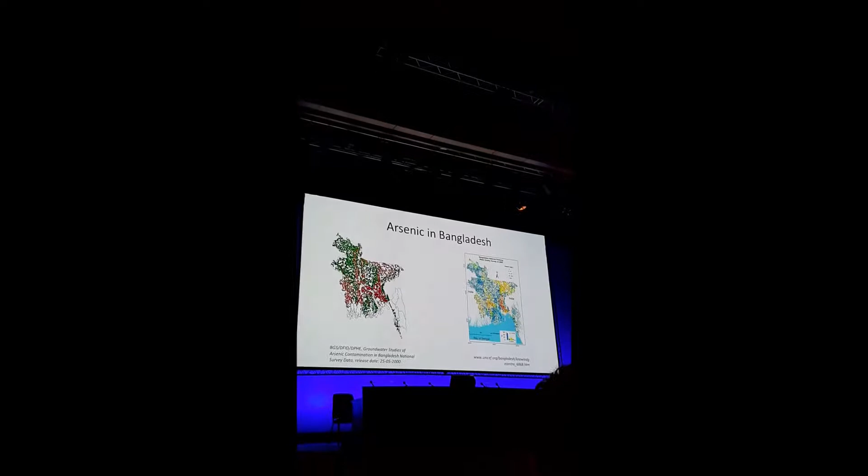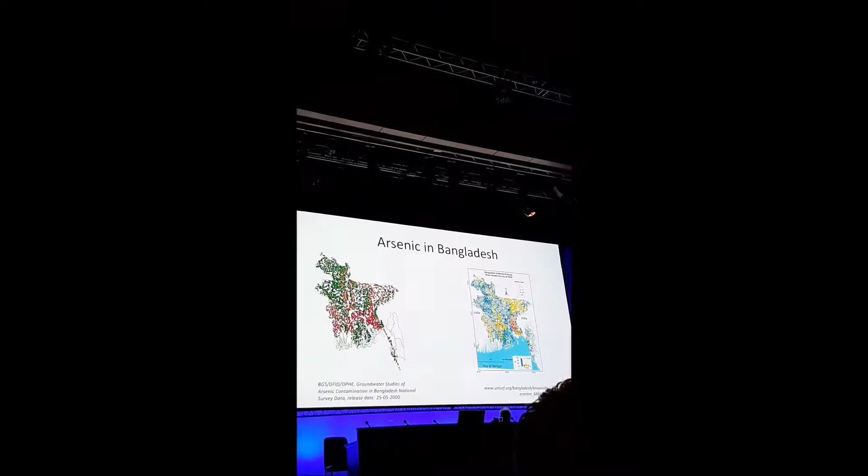So the most famous example, unfortunately, of arsenic poisoning is Bangladesh. On the left you see the first survey that had been done by the British Geological Survey alongside the government in Bangladesh, DPHE. And they investigated over 3,000 wells in the country to assess the scale of the problem. And it clearly shows that the wells that are red are over the national guideline, the orange ones are over the international guideline of the World Health Organization, and the green ones are good, that the scale of the problem is big.

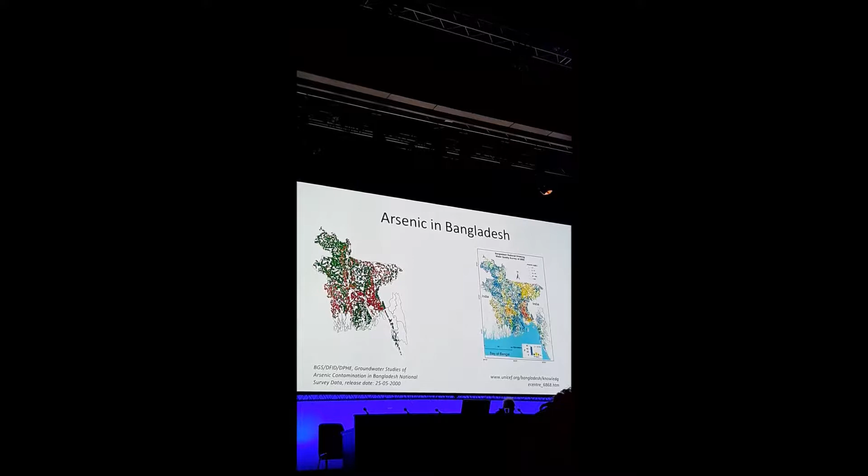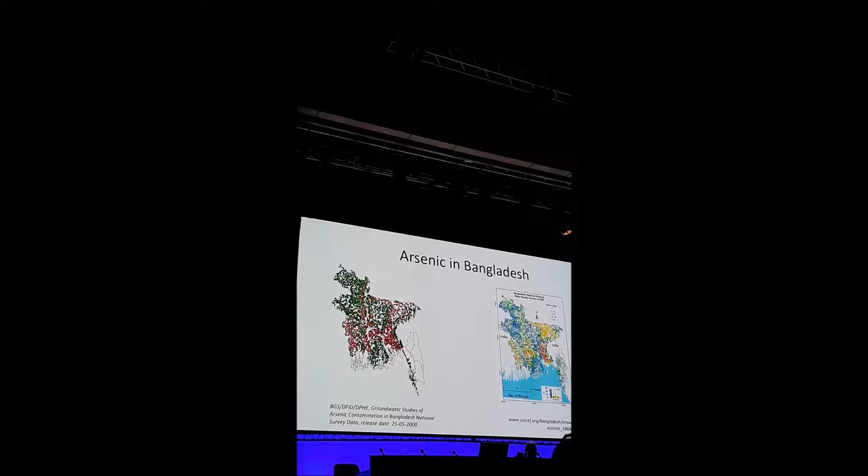On the right, there's another survey, almost a decade later, where they sampled not the direct wells, but the water containers of which people were drinking. So this is the true drinking water survey, and over 20,000 samples were taken. It shows a different map, but it also shows that still between 50 and 60% of the population doesn't have access to safe water, mostly related to arsenic.

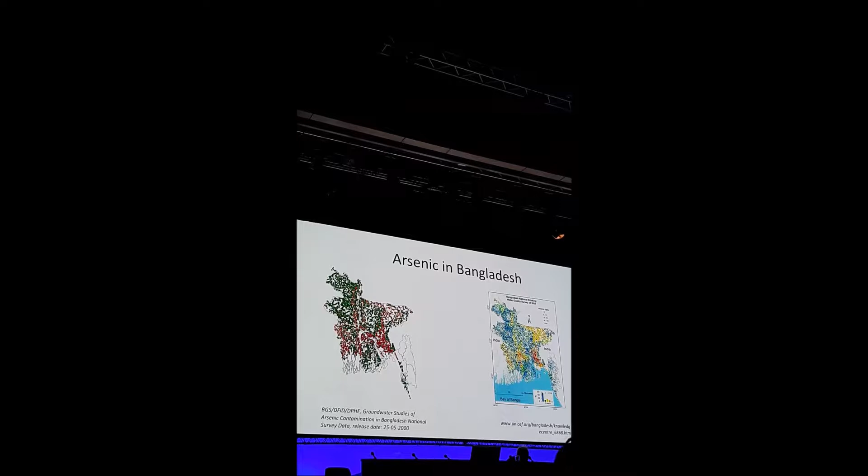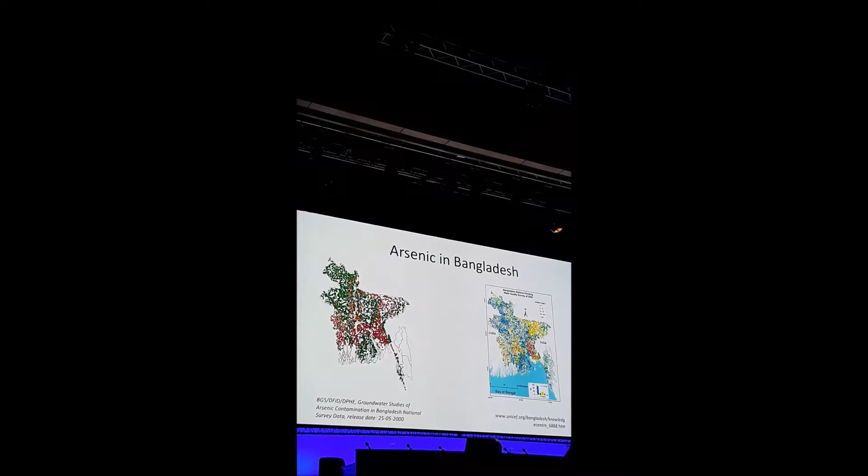Having said that, the intervention of moving away from surface water towards groundwater has been a huge hygienic jump in the country. Before, people were drinking from the ponds or the local rivers, meaning a lot of problems with child deaths. And so there is a new problem now, but I want to point out that this problem, if you look at the DALYs, is smaller.

I made this presentation obviously before today, but the knowledge gap has been raised, and apparently I knew about this, because I think there is a huge technology gap. So if we go to a village, for example in northwest Bangladesh, where we are working now, close to Rajshahi, people have access to water. So there's a hand pump in most of the premises. However, it's often not known whether the water quality is good for drinking or not. So when you decide to drink this water, you are at a high risk of exposure, whether you have arsenic or not. The risk is there.

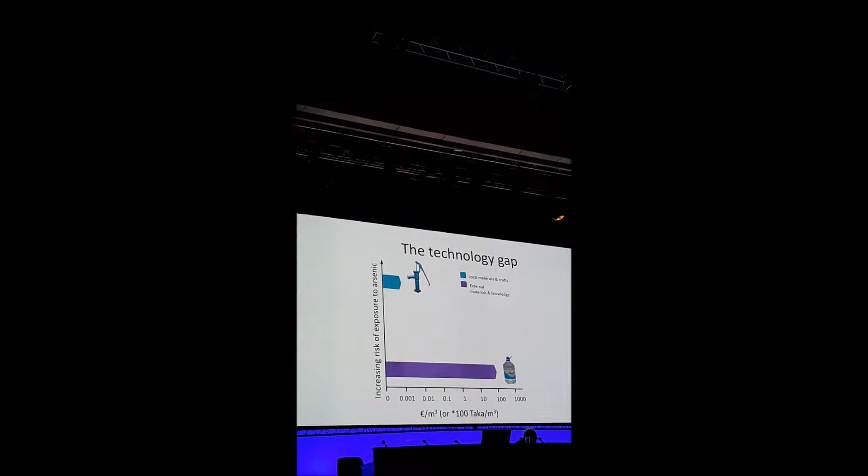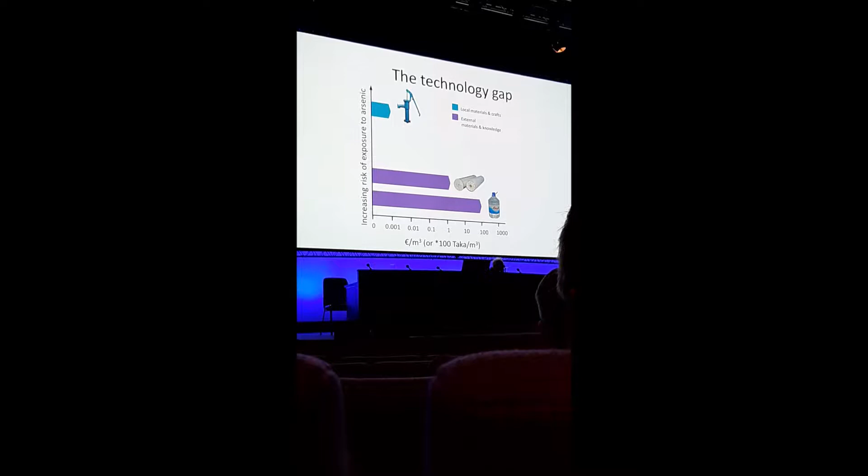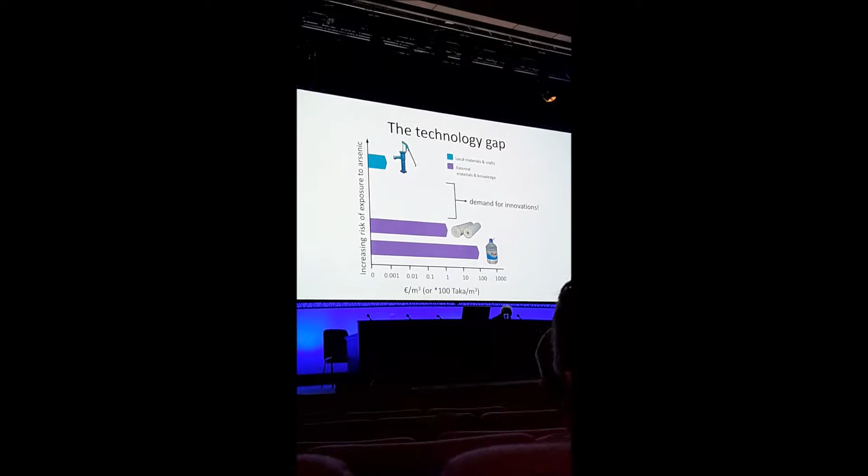Meaning that there's a huge demand for innovations, for local innovations, innovations that suit the context in which they have to sustain. So why crossing borders? I'm obviously not from Bangladesh myself, although I did my PhD research there, so I've been there since 2007.

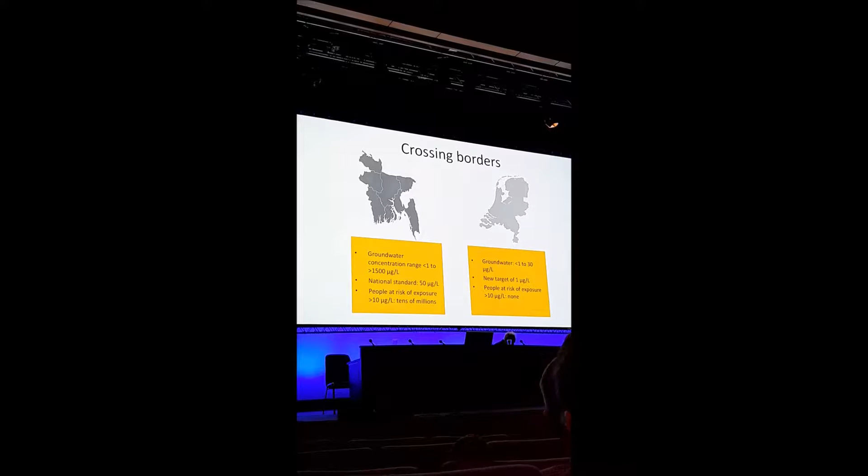But I was doubting whether I should put up this slide, because the differences couldn't be bigger. In Bangladesh, as I said, the concentrations of arsenic are really high, over the milligrams per liter. Whereas in the Netherlands, we have a few locations almost reaching 30 micrograms per liter, which is below the guideline in Bangladesh. The national standard in Bangladesh is 50 micrograms per liter for drinking water, whereas in the Netherlands we have just adopted a new target, which is to go under 1 microgram per liter.

And then the people at risk of exposure over 10 micrograms per liter, which is the WHO guideline, is tens of millions in Bangladesh. Estimations vary here and there, and in the Netherlands, let's be honest, it's none. Nevertheless, the research aim is quite similar, because in the Netherlands we rely a lot on aeration filtration systems. Not to give a long introduction on arsenic removal technologies, but just to be very short, there are two groups.

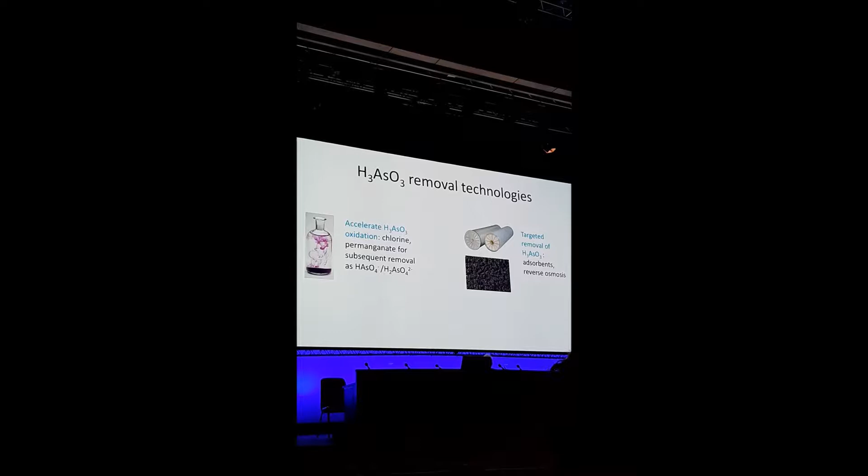Groups that rely on pre-oxidation of the arsenic with a strong oxidant, for example chlorine or permanganate, for subsequent removal of the arsenic 5, the arsenate, which is charged, so you can remove it with coagulation or ion exchange resin. Other group of technologies are specifically targeting arsenite, so the reduced form of arsenic in the water. So for example, there are adsorbents around, and there are also membrane barriers that can be used for it.

In my presentation, I want to show that we don't need these technologies. Of course we can use them, but the past has shown that it's difficult to adopt them in Bangladesh, and I think we can do without for most water types. Because the groundwater carries the main ingredient required to remove arsenic from the water. It carries ferrous iron. If ferrous iron comes in contact with air, it will oxidize to form iron 3+ and iron oxides. These iron oxides are perfect sorbent bases for arsenic.

However, as I mentioned before, we have the reduced species in the water, which is uncharged, more difficult to remove with iron, and we want to have the oxidized form of arsenate in the water. This is where the problems start. Because if we aerate the groundwater, the redox potential, the EH, will go up. So will the pH, because we sparge out the CO2. And hydrous ferric oxides, so these iron oxides, HFO, will form.

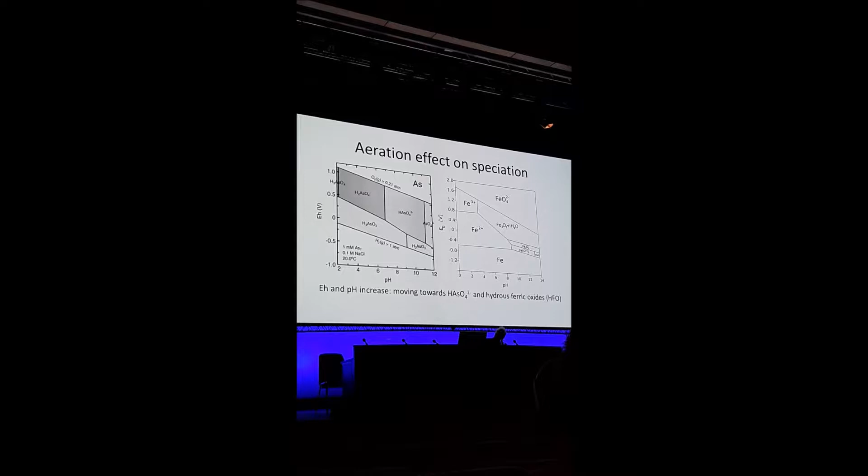And you would say that we also oxidize arsenic. If you look at this graph, I'm sorry, I didn't make it myself, the EH-pH diagram, you would say, yes, we will form arsenate as well. So perfectly, we can remove them together. However, arsenic oxidation, it's really slow. If you just add air, you can wait for a week before it's all oxidized. Whereas you all know iron oxidation at neutral pH, it's really, really fast, seconds or minutes.

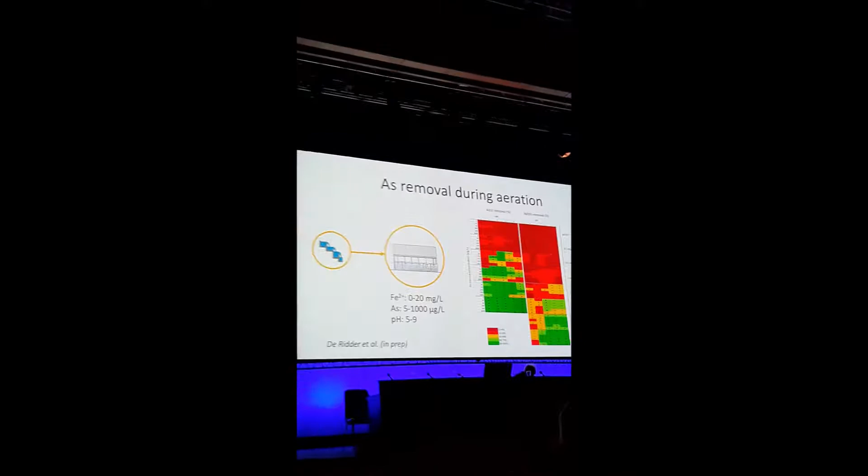So if we simulate this aeration of the groundwater in a simple jar beaker experiment, where we combine different concentrations of iron as well as different concentrations of arsenic over the relevant pH range for us, you can make a really nice overview. In this overview, you see on the left, it's arsenic 5, which is the oxidized form arsenate. And on the right, you see the arsenic removal as arsenic 3.

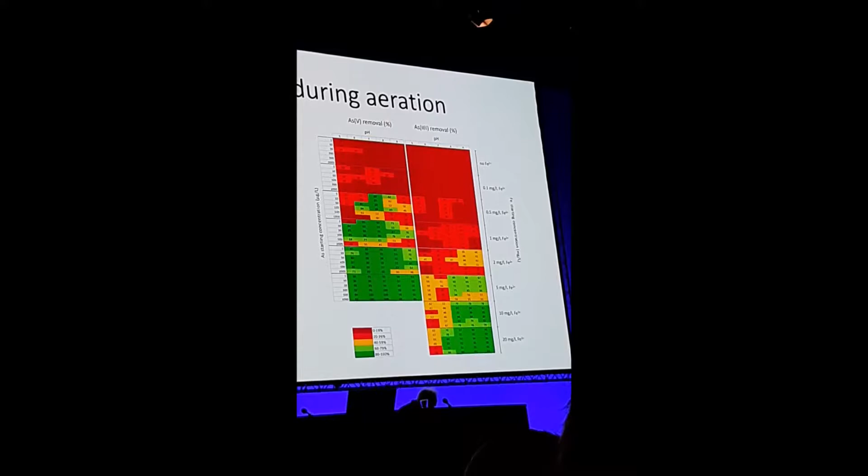And if we zoom in further, in the iron range that is of our interest, between 0.5 milligrams per liter of iron all the way up to 5 milligrams per liter iron, well, the left is greenish, meaning that it's removing arsenic over 80%, whereas on the right, where it's the reduced form, it's all reddish. So it's clear, if you just aerate the water and you do nothing else, you will only remove a fraction if you have the reduced form of arsenic, and you remove a whole lot if you have the oxidized form of arsenic. But you don't have that if you just aerate the water.

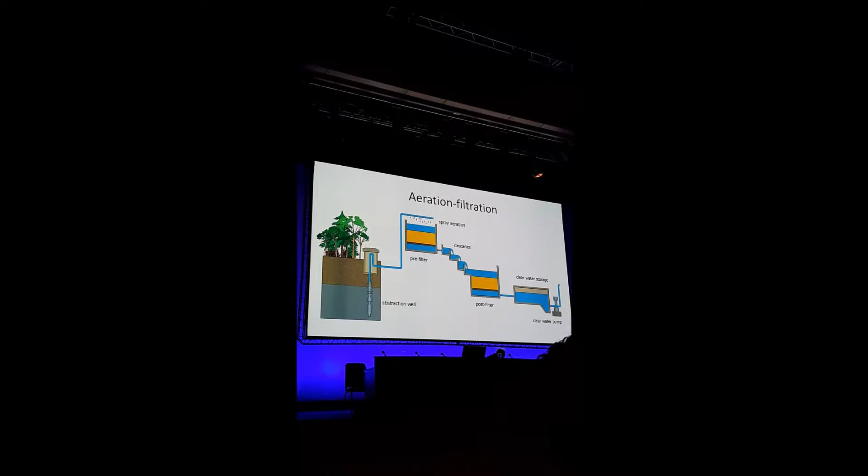And what we were interested in is to see what happened to arsenic also in the filter bed. Because if you just aerate, you still have arsenic 3 left that enters your bed. And what we saw is that arsenic is hardly removed in the filter bed. There is some removal, but not too much, a little bit depending on the design of the filter.

What was particularly interesting to us is that we saw quite fast oxidation of the arsenic 3, so the arsenite, the reduced species, again to arsenic 5 in the top layer of the filter bed. For free, for nothing. But it was not removed. Arsenic came out as arsenic 5.

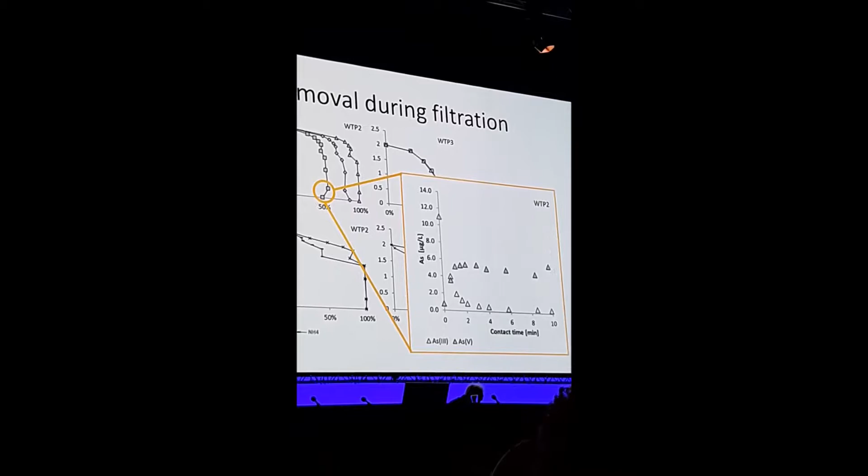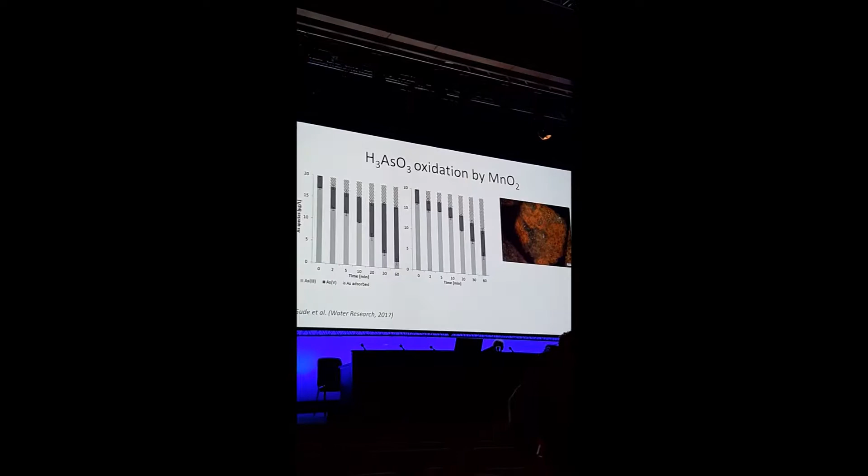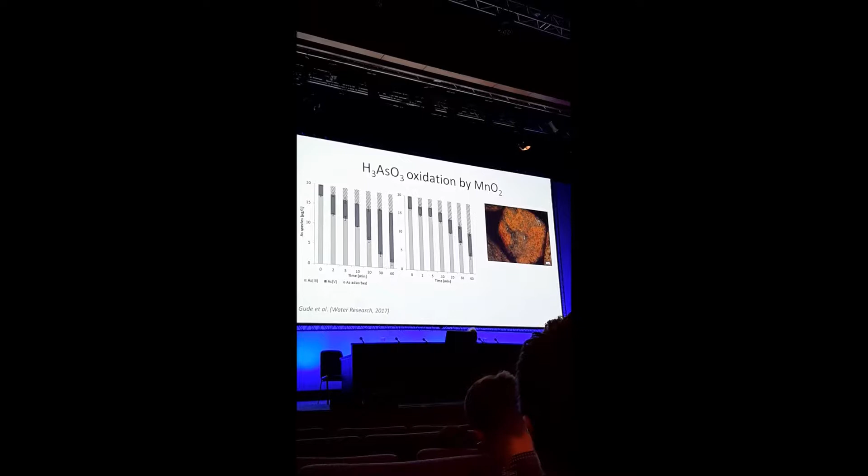So the first question we had, why is this arsenic being oxidized in the filter bed? And the first suspect we thought of was manganese oxides. Manganese oxides are known to be capable of oxidizing arsenic, and when we did a small lab study with manganese oxide we bought, that's the graph on the left, and the manganese oxides we took from a filter bed, we indeed saw really beautiful arsenic oxidation profiles. Not as fast as we would expect, but still it happened.

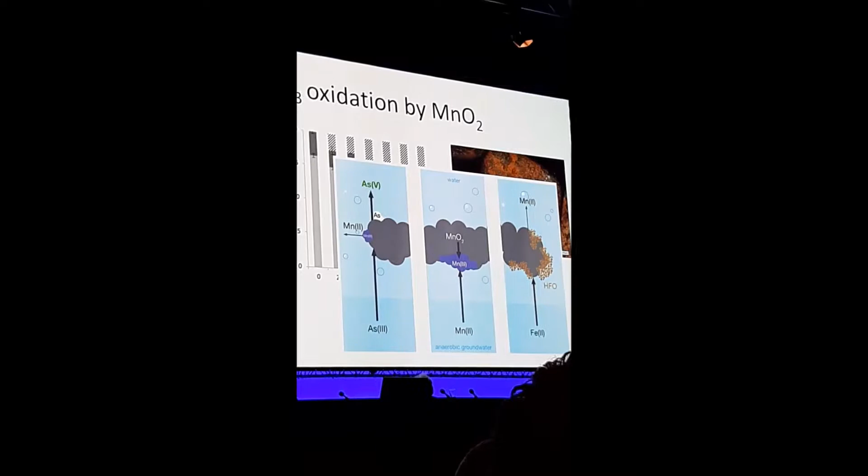However, as I said, in groundwater, arsenic doesn't come alone. There's iron 2, there's manganese 2. If you add those two to the same beaker, you do not get arsenic oxidation. It's completely hindered by the presence of iron 2 and manganese 2, which will be oxidized, by the way. So in our opinion, we're quite certain it's not the manganese oxides that do the job.

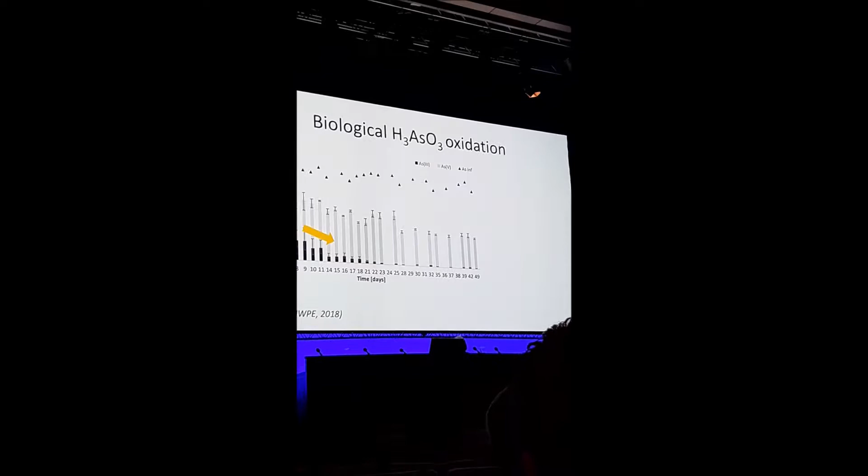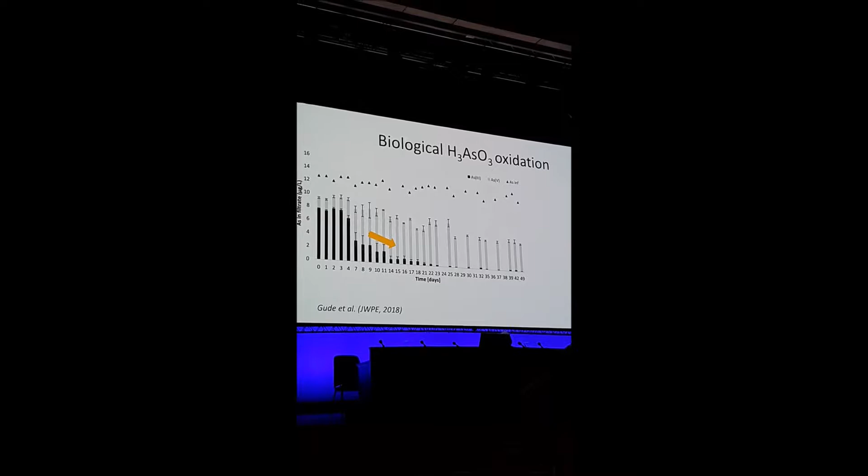So being civil engineers, we were not really looking forward to going in this direction, but we saw no choice but suspecting microbiology. I know there are a lot of bioengineering experts in the room. We felt uncomfortable moving in this direction, to be honest. But we saw now in many, many different systems that there are organisms that are doing the job for us, in groundwater, in surface water even, and they're not superbugs. That's what we thought first. No, they're just very ordinary groundwater native organisms that grow in any filter.

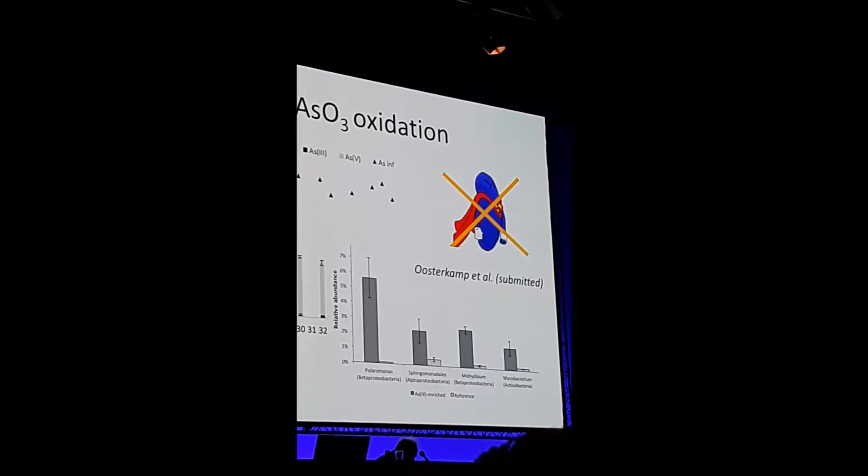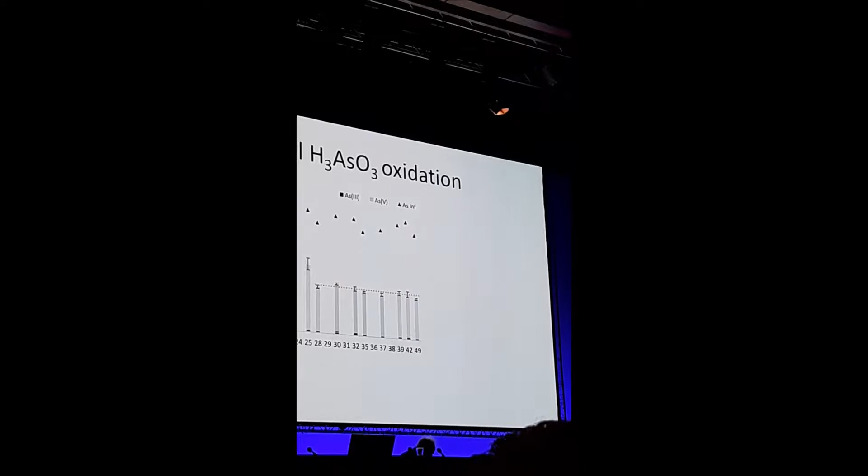I think also if you have filters at home, you might check it out. They might be there as well. So it's something that actually does happen for free already in the filters, but we're not utilizing it for removal. Because as you can see, even after 49 days of operation, the removal of arsenic has stabilized, so there's no more removal being achieved, even though it's fully oxidized in the filter.

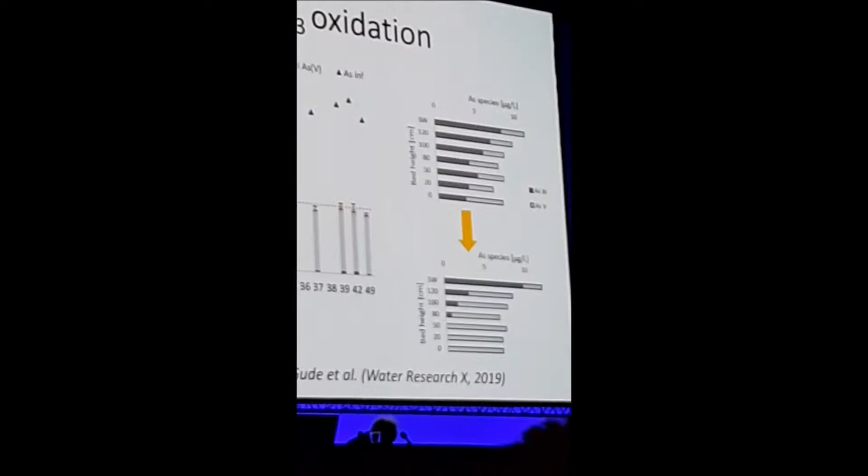And what we found particularly interesting here is that after 28 days, this stabilization, and we showed it later in different experiments where we could measure over the height of the filter, shows that arsenic bacteria are moving up. So initially, when you just start up a filter, it is over the whole height of the filter, that's the top one, and then after several weeks, the arsenic oxidation will happen fully in the top layer of your filter bed. And it moves faster than ammonium oxidation and manganese oxidation, by the way.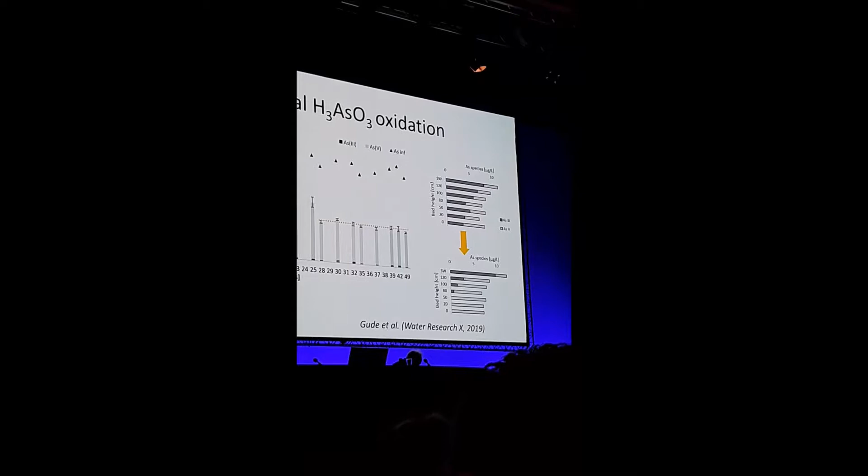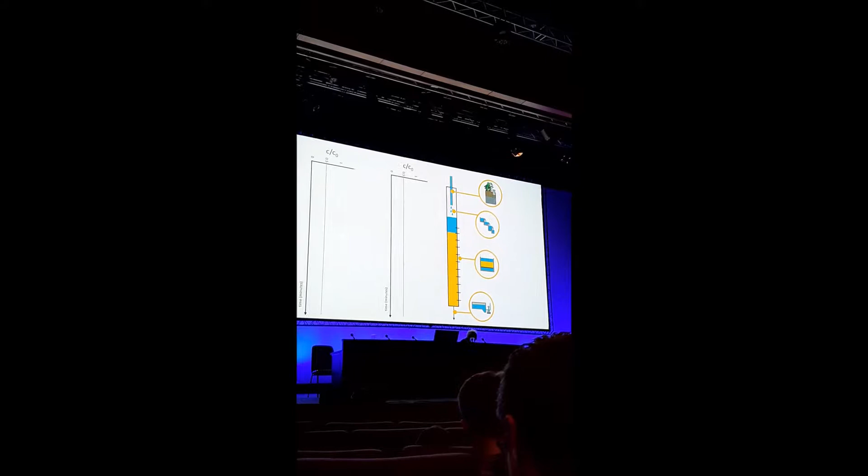So what do we know now? If we would simulate aeration filtration in a column setup, and we would plot iron, we would have first iron 2+ in the top of the system. Upon aeration, there will be fast oxidation of iron 2 to iron 3 and immediate formation of HFO, these iron oxides. And then they're removed in the top layer of the filter bed, depending on the filter media. If it's a sand filter, for example, in general, the top layer is where the iron is removed.

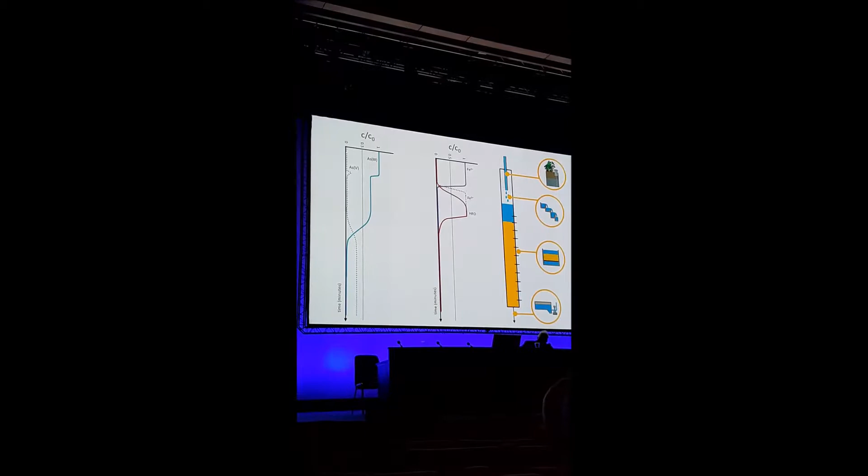So if we look at arsenic now, the profile looks different. You get some co-oxidation when iron oxidizes, we know that. So there's partial oxidation and removal of the arsenic. But then nothing happens until the water reaches the filter bed, where you also get oxidation, the microbial oxidation, and partial removal.

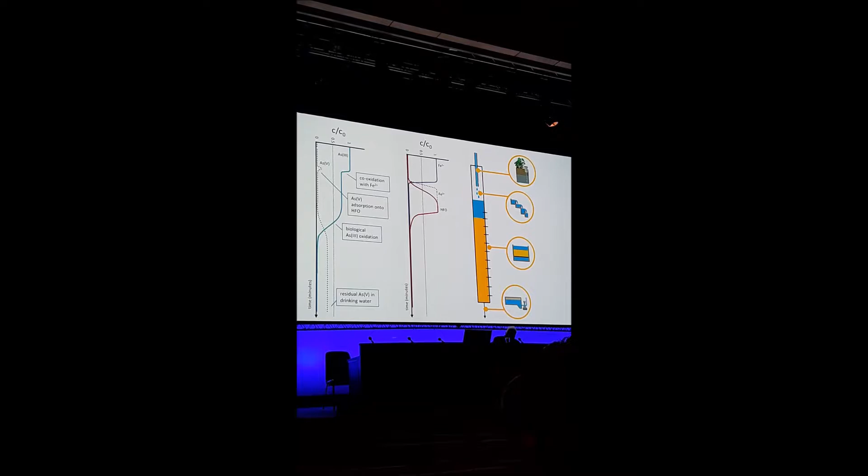But there's still residual arsenic 5 in the drinking water, so we can do this better. Now knowing the ingredients of our system, can we engineer it such that we enhance the removal that you can achieve with the iron available in the water?

There are several moments where you can intervene. You could enhance the co-oxidation and removal with iron, you could stimulate the biological arsenic oxidation, and you could increase the adsorption of arsenic 5 onto the HFO deeper into the filter bed.

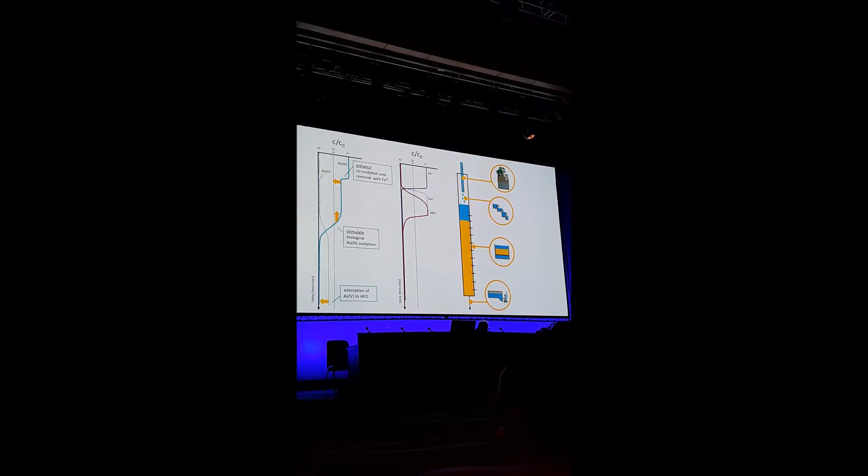As the starting point of our study, we didn't look at the arsenic, but we focused on the iron, because that is the sorbent. We wanted to delay the iron oxidation for it to be available once arsenic was oxidized, and we wanted to promote HFO mobility over the filter bed to make sure you don't just have sorption potential at the top of your filter bed, but also deeper into it.

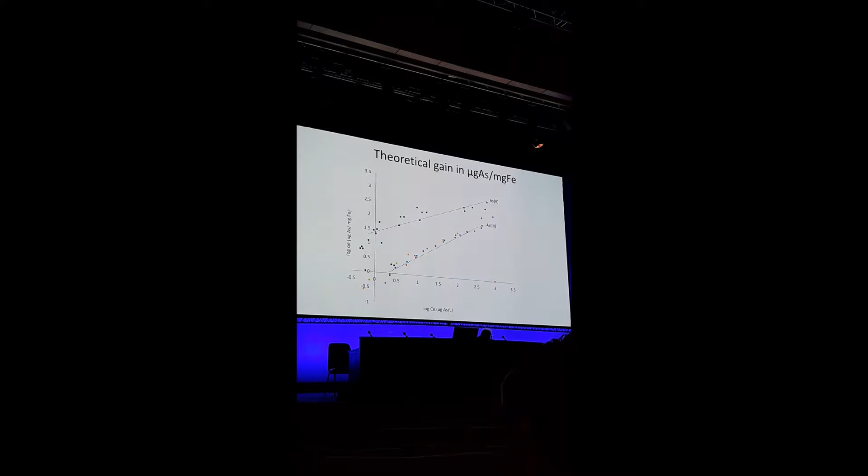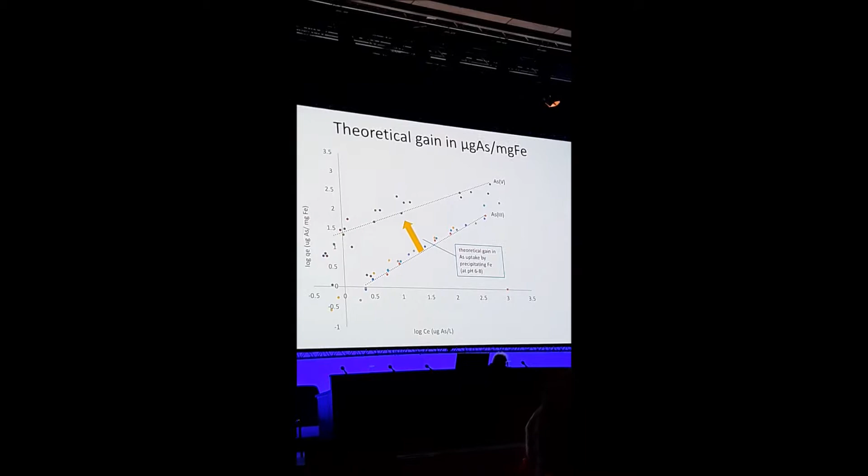I thought it would be nice to show you the theoretical gain that can be achieved. If you look at the micrograms of arsenic that can be sorbed per milligram of iron, whether it's arsenic 3 or arsenic 5, this is not being utilized if you just have aeration filtration.

So our task for engineering is to stimulate arsenic adsorption onto this iron while promoting the oxidation, preferably biological. So we developed a few solutions for this.

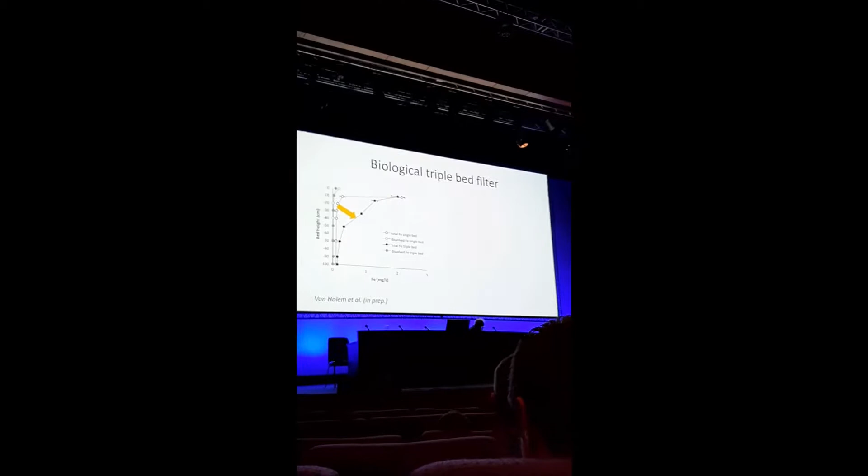One is the biological triple bed filter, as we called it. It's a relatively simple filter actually, like a dual bed filter, but then triple. So we have very coarse media, anthracite on top, coarse sand in the middle, and then garnet sand at the bottom, so we can backwash it easily.

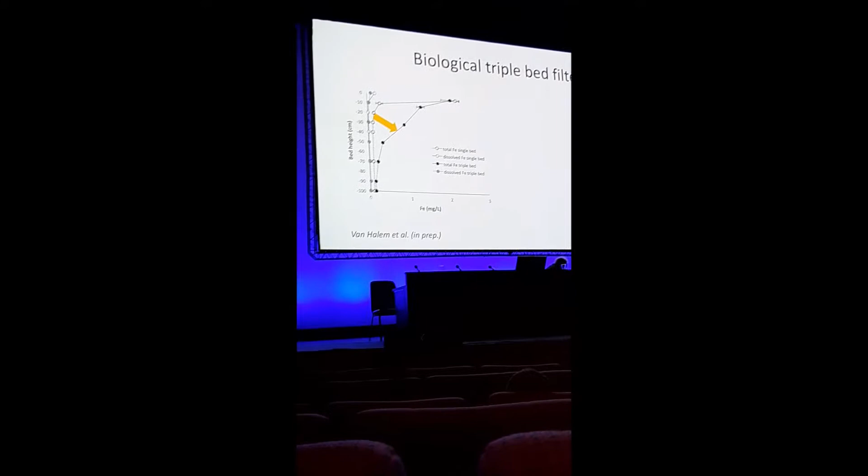As you can see, the iron profile moves further deep into the bed. The dark dots are the triple bed, whereas the open dots are the single bed.

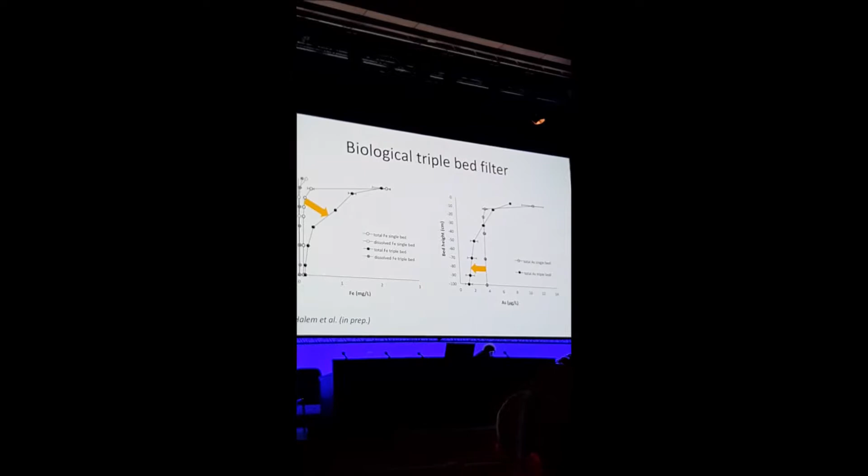Then there's the question, will arsenic follow? And yes, arsenic removal follows over the full height of the filter bed, meaning that we achieved the new target of 1, more or less. We were quite happy with it.

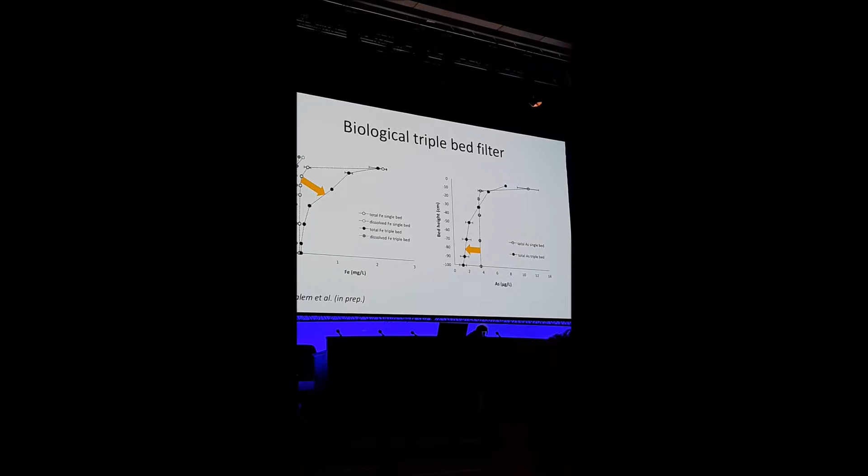Things you can play with, for example, reducing the pH slightly will enhance arsenic sorption on the HFO. What I find particularly interesting is we also tested the supernatant water level, on the right. At the top we had a really low supernatant water level, that's the water on top of your filter if you have a saturated filter.

At the bottom we increased the supernatant water level to 1 meter 30. What you do then is stimulate homogeneous iron oxidation over heterogeneous iron oxidation, meaning you form flocs that are more mobile in your filter bed, which you can see on the left where the iron is plotted, ending with a lower arsenic concentration in the end. Again, concentration differences are small because this was a pilot site at Pitspa in Belgium, and unfortunately they don't have high arsenic.

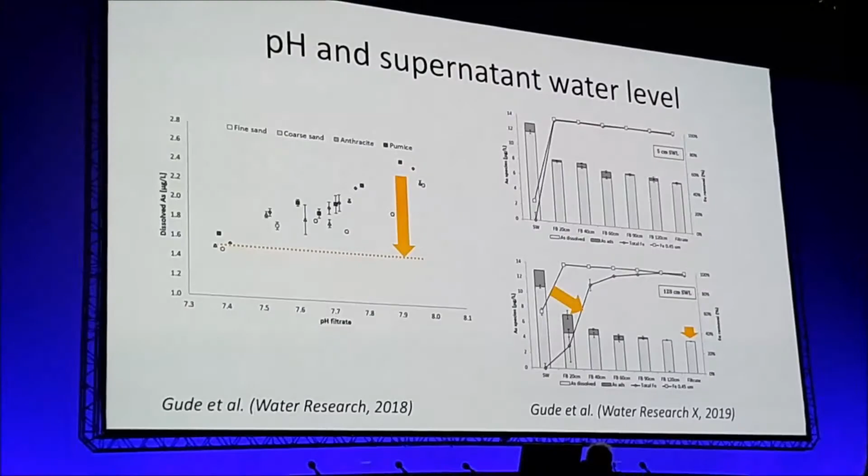But we also go to Bangladesh. This is Kajul, a PhD student, and the research we're doing in Bangladesh is in the region where he's originally from. He's investigating how to use these insights for a system in Bangladesh.

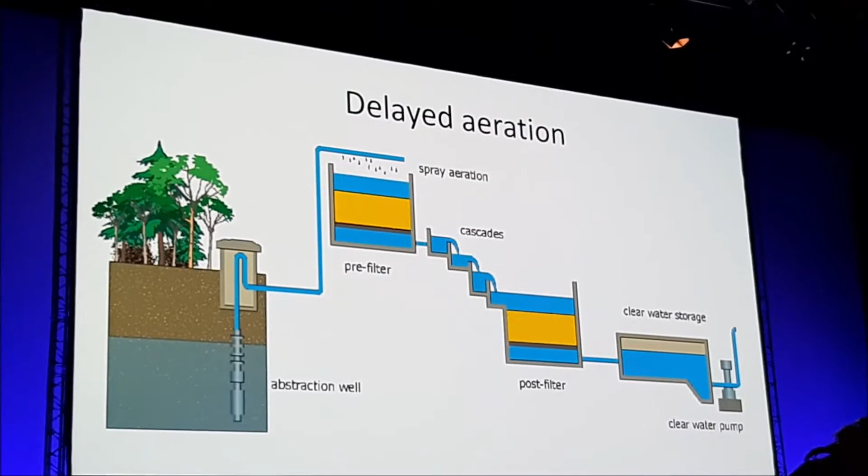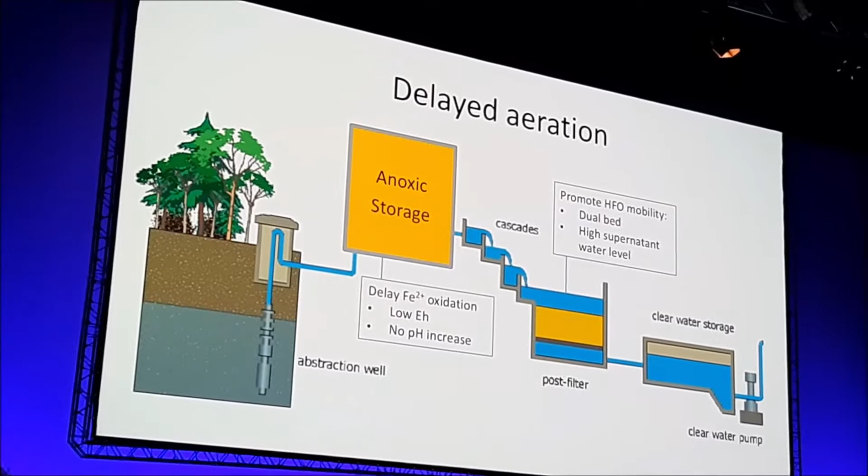What we did is we wanted to delay this iron oxidation, and we decided to do it with anoxic storage prior to aeration filtration, because at low EH and without aeration you would not have a pH increase. This would reduce the iron oxidation, together with the promotion of HFO mobility in a dual bed and a higher supernatant water level.

Well, the setup in Bangladesh looks really nice. Normally you have these rusty PVC columns, but we collaborate with industrial design engineers, and they found a rickshaw artist available to make this for all of our filters. Really nice, the color makes it special.

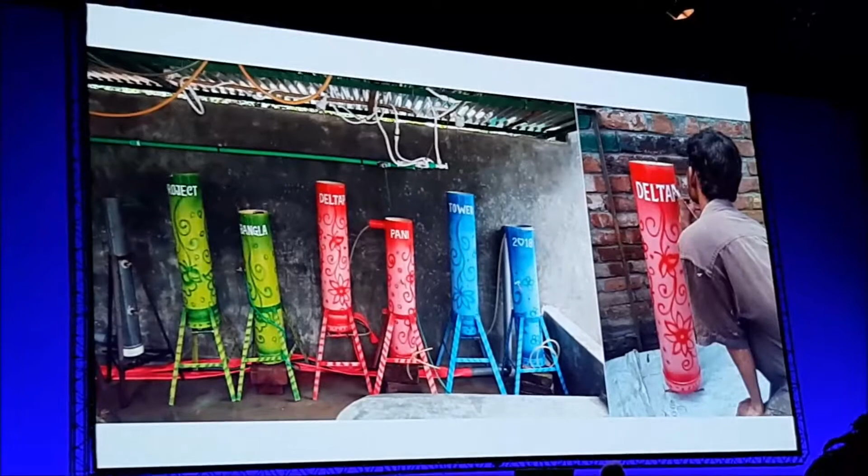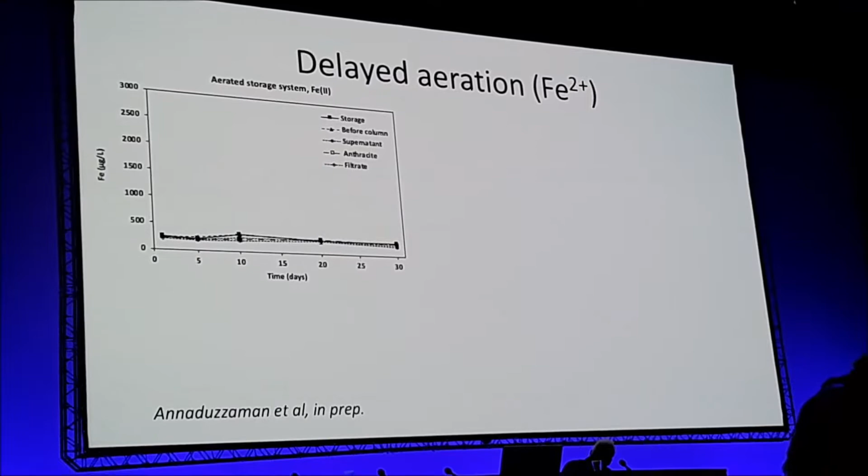The PhD candidate is still digesting the results, but I thought I would share them anyway, because I think they're spectacular. If you have an aerated system, just plain aeration filtration, you remove your iron rapidly during oxidation, as I said before. So all the iron plots overlap for either sampling in the storage container or before and after the filter.

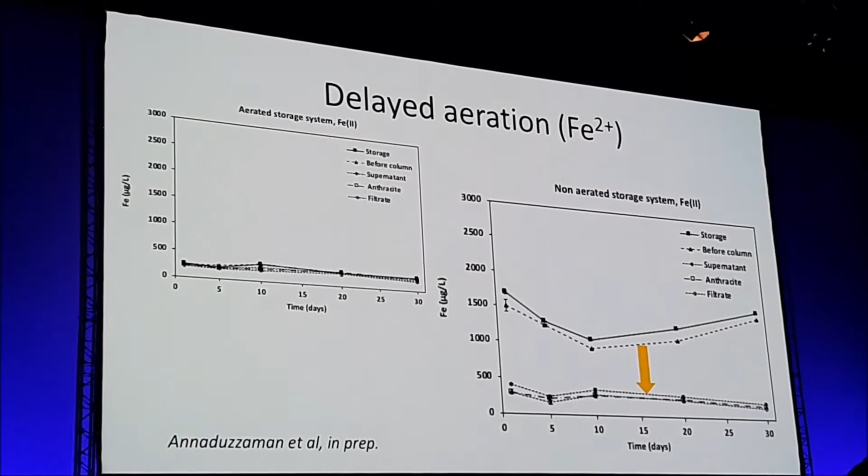However, if we have no aeration, we call it anoxic storage, but I suspect there's some oxygen contamination in our system, because we do get iron oxidation already on day 1, but only partially, which is really what we wanted. The iron is not removed in the storage container, but is removed after aeration.

In an aeration filtration system, we go from about 300 micrograms per liter to 140 micrograms per liter. So initially there seems to be better removal, but I suspect adsorption on the sand we were using, which is just natural sand from there. So the removal is just over half of the arsenic.

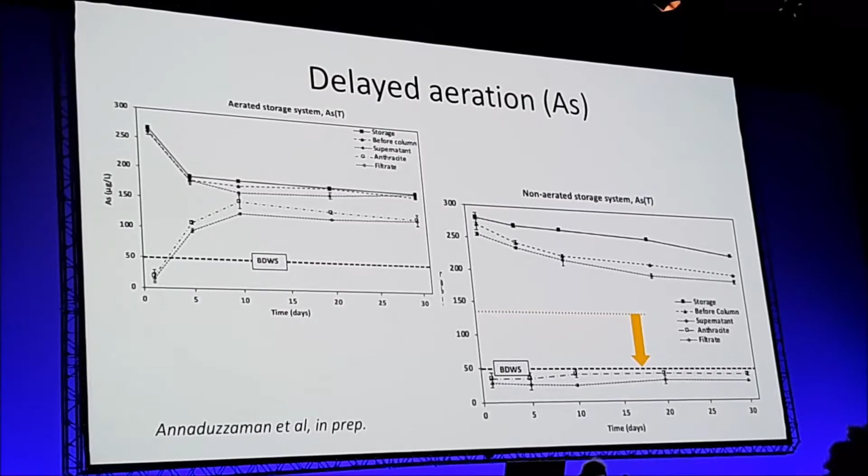Whereas if we have a system where no aeration has occurred, we reach 40 micrograms per liter, which is a huge increase. And I think we can even do better, but this is a really nice start.

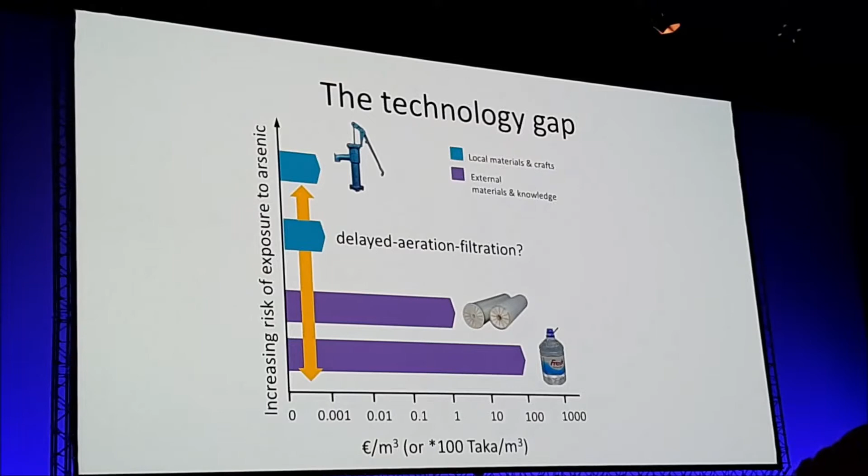Yeah, but does this fill the technology gap, eh? I think every story needs to have a head and a tail. I don't know, I think this is a big jump still ahead. But what I do like is to experiment and see what we can do with these process-related insights towards design of a system that could be applied.

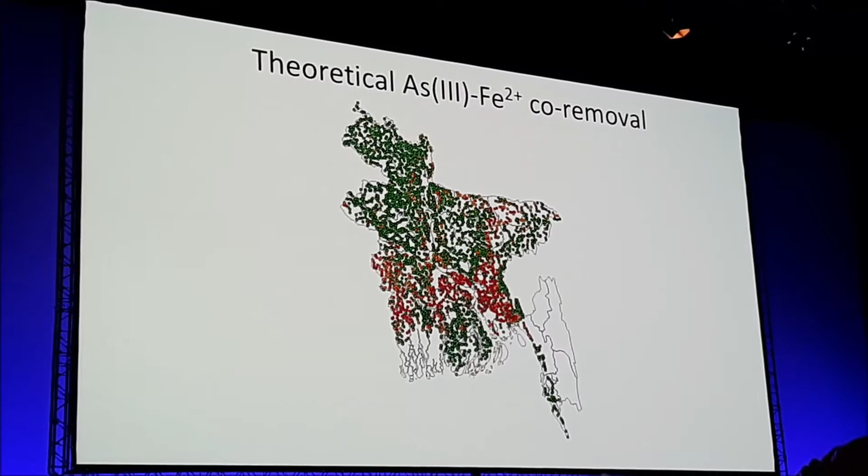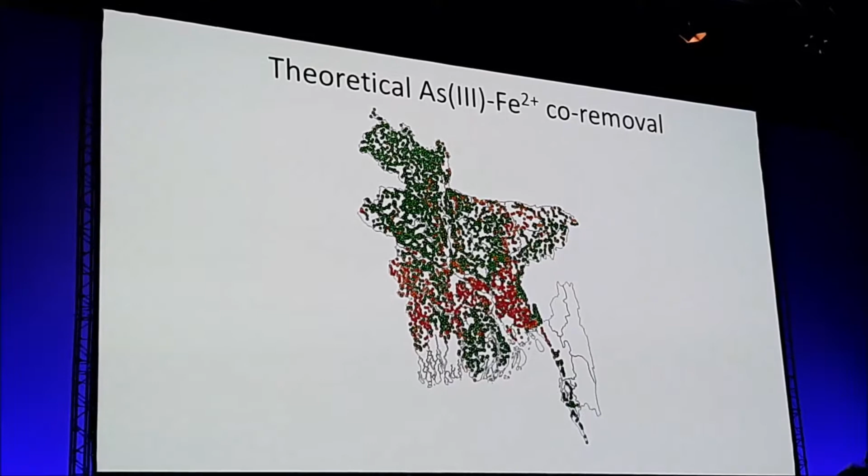And if we may dream, the theoretical removal of arsenic-3 with iron, if you look at the arsenic-iron concentrations that have been measured in the BGS study, the map would look like this. Slightly different than the earlier map, but it's difficult to find the differences.

And if we would work with a system where we optimize iron removal, co-removal with arsenic, it looks like this, meaning that instead of 65, 95% of the wells in Bangladesh can remove arsenic just by relying on the iron in the water. So there's a dream.

What's next? Well, what's important is to know, of course, where's the arsenic, but also where's the iron in the system, in order to start constructing filters, whether it's central or decentral, doesn't matter.

So what we tested was an iron test strip app. It's an existing app where an iron test strip is combined with the app. Maybe some of you might have used it as well. It's inexpensive, easy to use, so we had it used by end users themselves. And we wanted to generate crowd data with that.

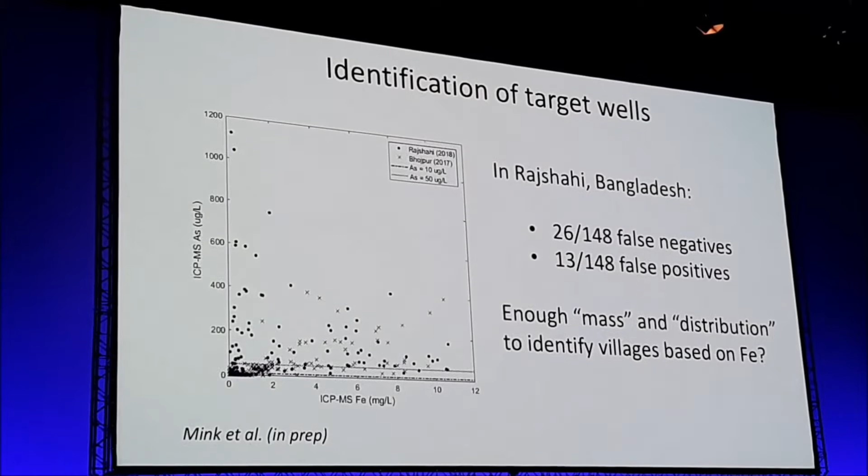But does this crowd data beat the inaccuracy of a test kit like this used by untrained people? Well, we did this study in India and in Bangladesh. I'll focus on the Bangladesh data here.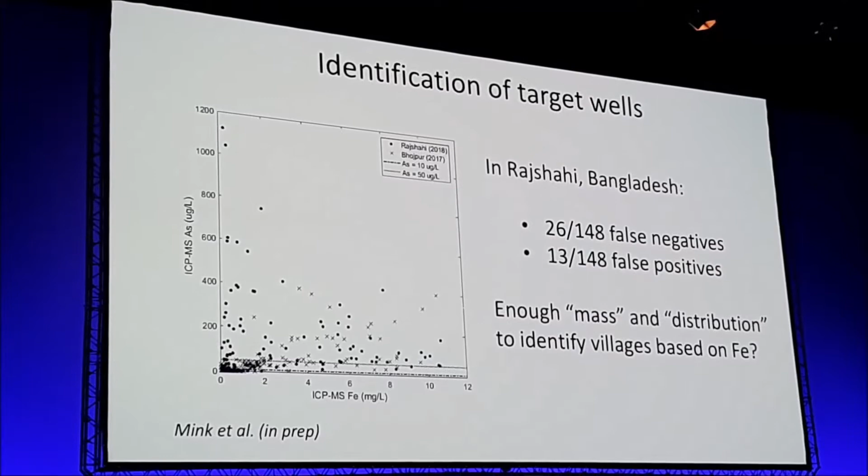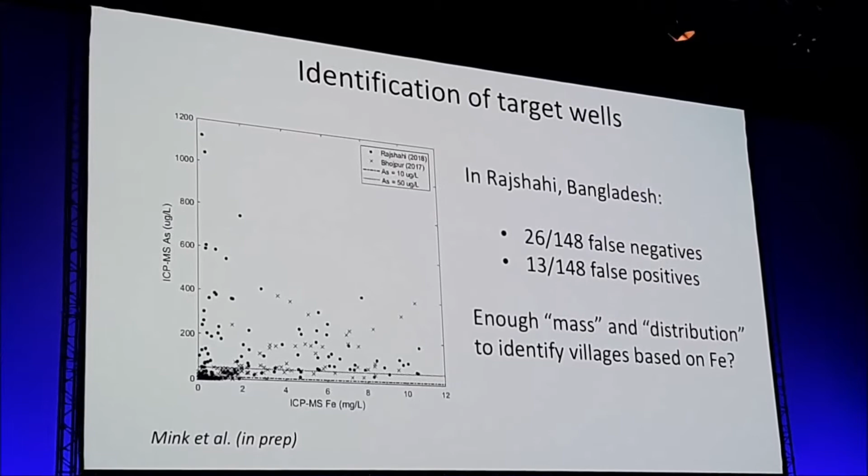In this map, it's just the ICP-MS data for arsenic and iron. And if you take a glance, you see immediately there's not a really strong relationship between the two. You can also see in the false negatives that there are 26 out of 148 in our study area in Bangladesh. So at first glance, maybe this doesn't work.

However, if you generate enough mass and the distribution of your false negatives is evenly through an area, through the villages geographically, for a screening tool it doesn't matter so much.

So if you plot our data with QGIS, on the left you can see the iron test kit results. There are more or less 7 villages included in the study, and to the left, right, and all the way up, these villages are difficult to see because they're really small dots, hardly any iron. Then in the middle and in the bottom, there are also a few villages with really high iron concentrations.

So just relying on iron, knowing that iron co-occurs with arsenic, you know where to go, right? And indeed, if we plot our arsenic data on top of these test kit data, you get a really nice map. So I would say, even though this relationship between the two is not perfect, as a screening tool for local governments, it can work really well, as well as empowerment of people, so they can test their own well, showing to the government that we have an issue potentially in our village.

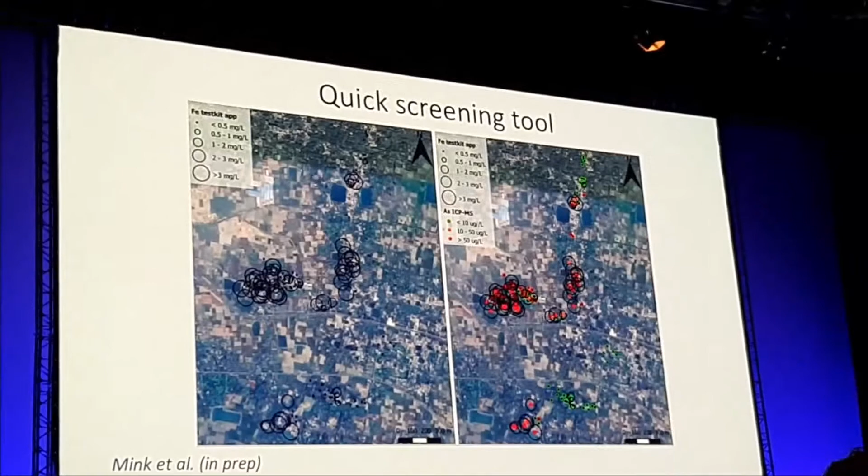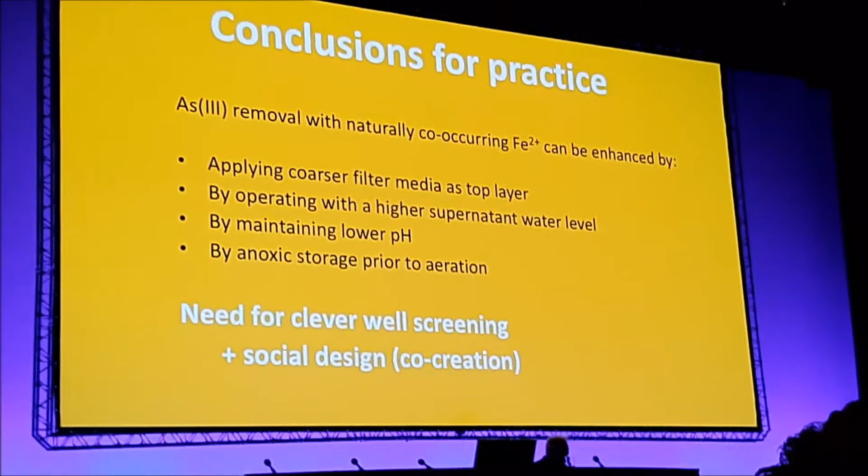So, conclusions for practice. Yes, it is possible to enhance the removal of arsenic with naturally co-occurring iron, with simple engineering tools: apply a coarser filter media, operate a higher supernatant water level, maintain a lower pH, and use anoxic storage prior to aeration.

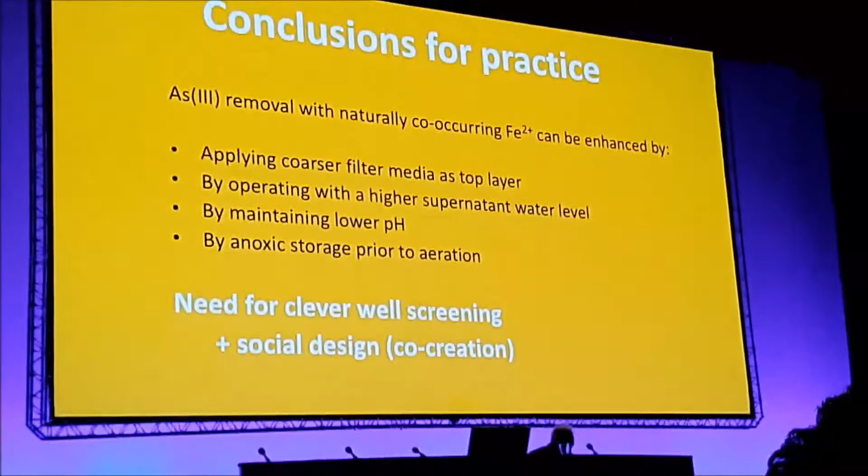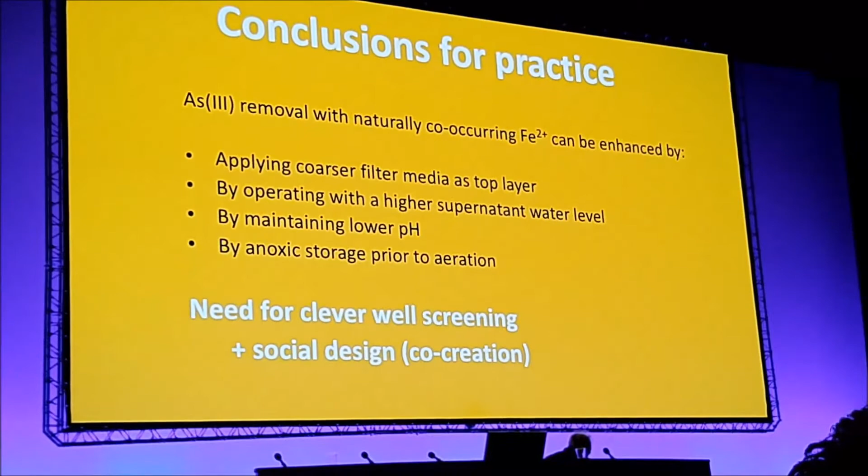But in Bangladesh, there's the need of clever well screening, as well as social design. Maybe co-creation, you've heard of it, it's key in working in villages like this, in the international context, but also difficult because amongst engineers, it's logical you co-create, but if we talk about end users in a village, how do you co-create with them? They are your customers, in a sense, or the customers of your local partners, at least.

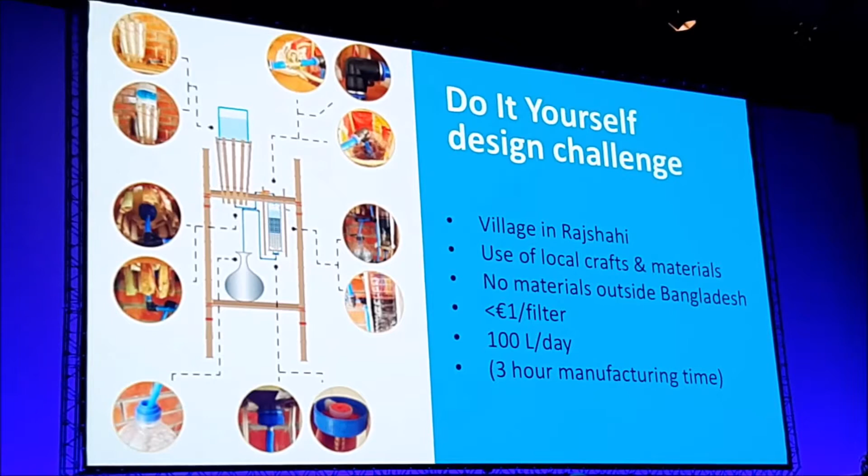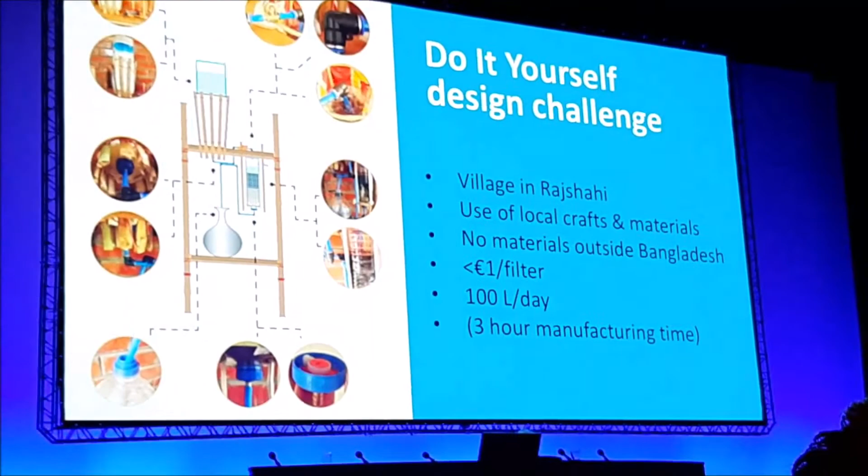So what I thought would be really nice to do in our study is to design a design challenge. I asked my colleagues of industrial design engineering, based on the processes we identified, anoxic storage, aeration, dual membrane filtration, dual media filtration, to design a filter that should be constructed just with local crafts and materials from the village.

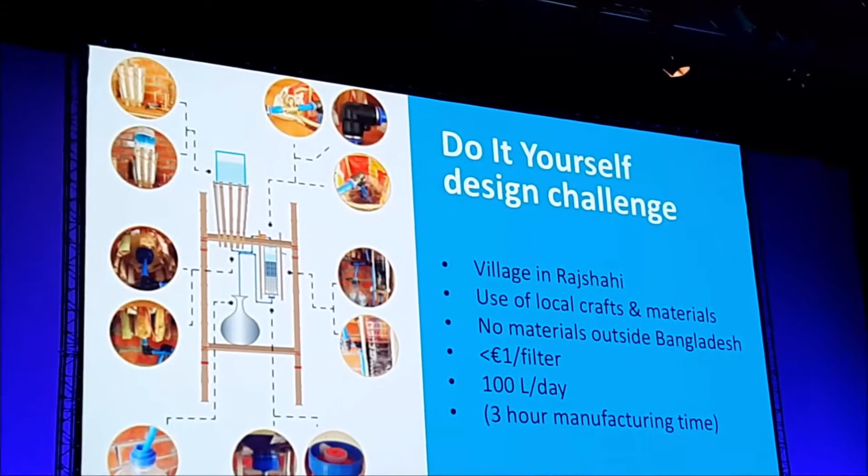No external machinery, no external materials. In the end they were allowed a few fake Festo tubes, connectors from Dhaka, which cost 50 cents. I want to get rid of those in future designs. The filter should be really cheap, produce enough for a family or more. And they added their own criterion, that they should be able to construct it in 3 hours.

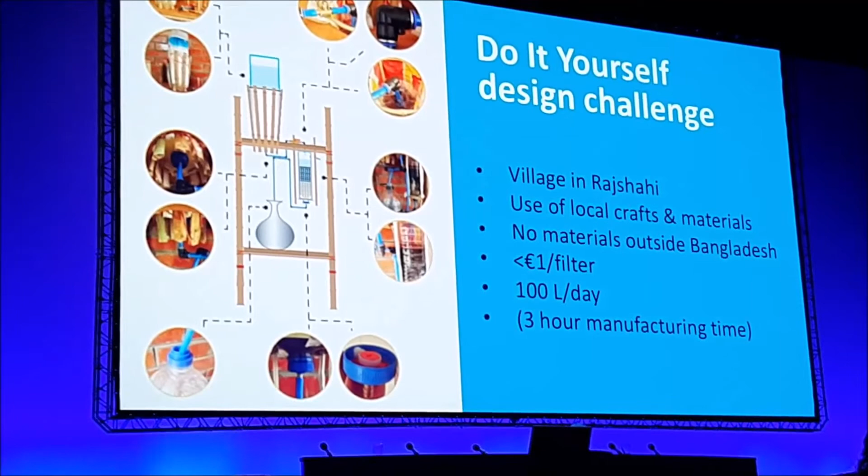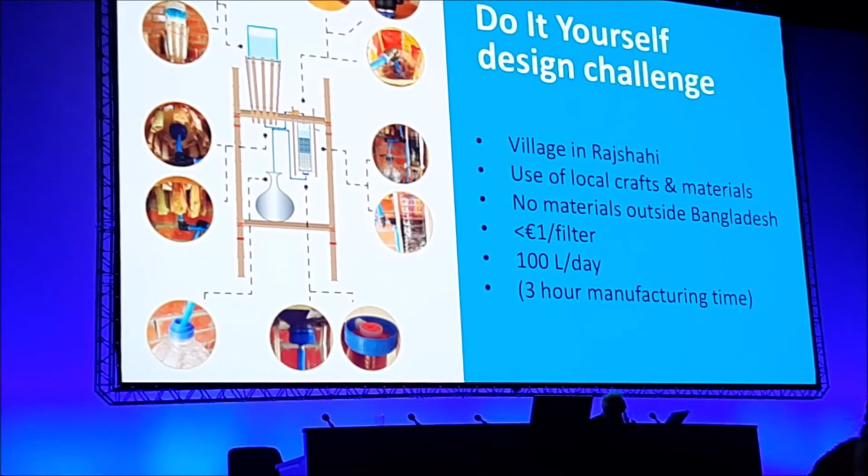My own civil engineering students always just spit out data, the slides I just showed you. But these industrial design engineers keep a blog, and I want to show you a short fragment of it. I think it shows the kind of environment we work in. It's a loud environment, but to me it gives this grassroots feeling. I know this solution might not be the solution, but it's something that activates people, which I think is valuable.

So there we go. Ooh, and I'm feeling...

Hey everyone! Join us in an auto rickshaw, fully loaded actually. Hey, we are 3 hours in line and we are going towards Uttar Kazipara. We're each giving ourselves 3 different tasks to work on individually.

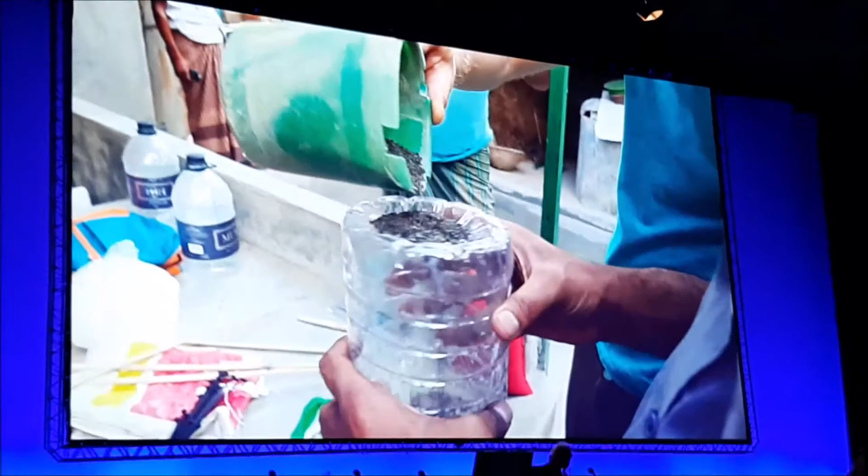Don't worry, why don't you say what you just told me on camera? Okay, we have just done so many works in less than 3 hours. We set up all the filtration system along with the frames and the pipings, poured the sand and the carriers, cut the pipes, everything in less than 3 hours, and I think it's a great success for us. Good luck to you.

Very good, well said. So everything is installed. Tomorrow we are gonna be back for testing the water properly.